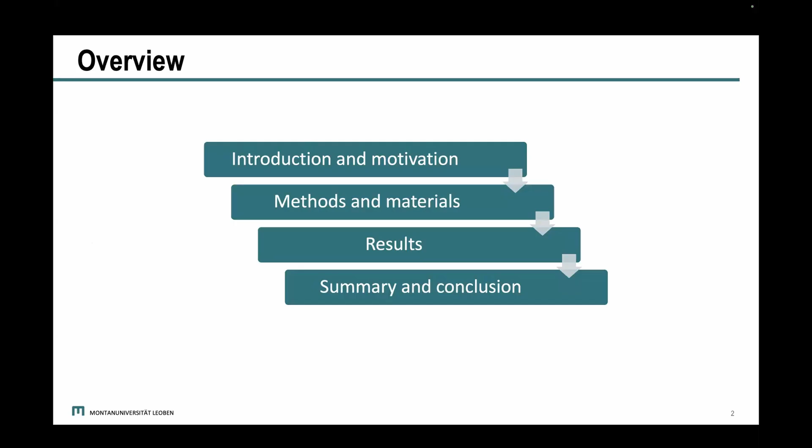At the beginning, we have a look at the content of the presentation. We're going to start with introduction and motivation, then we will go on with methods and materials, then have a look at results, and last but not least, summary and conclusion.

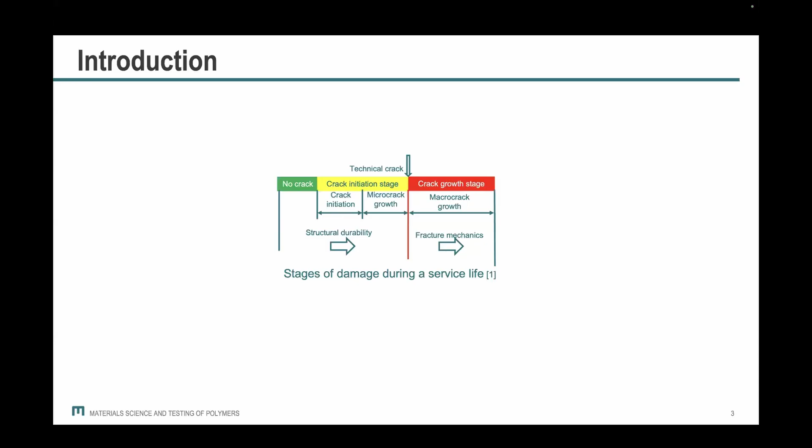Generally, the lifetime of each component could be divided into two different main parts. At the first part, we do not have any technical crack in the component. At the second part, we already have a technical crack in the component, and we have to deal with a growing crack in the component.

For the first part, we can use fatigue analysis. In fatigue analysis, generally, we deal with crack initiation and crack propagation. And the most powerful tool for lifetime estimation are the SN curves.

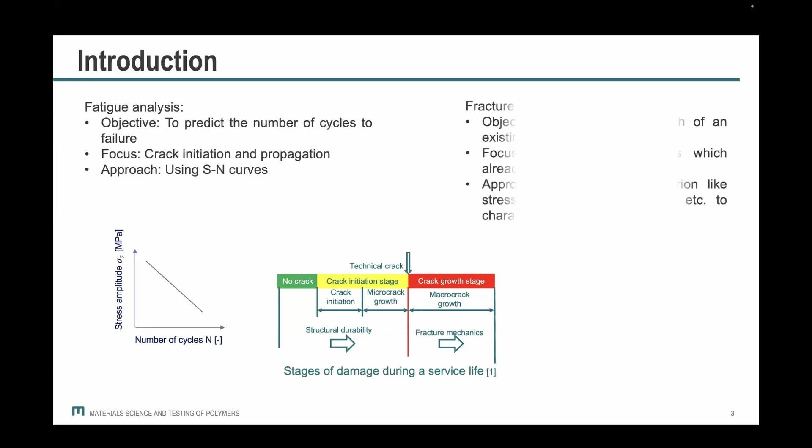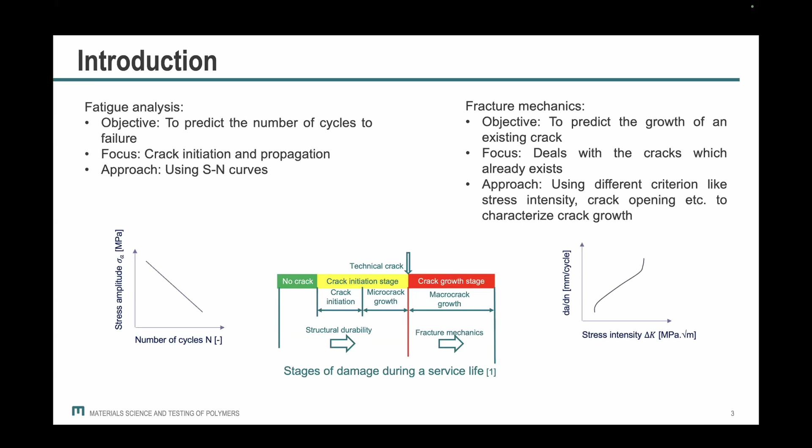We have also different tools for fracture mechanic analysis, but one of the most favored ones is the stress intensity against the crack growth rate, also called crack kinetic curves.

The main motivation or main idea of the presentation is to find any correlation between fractural behavior and fatigue behavior of the material of short fiber reinforced polymers.

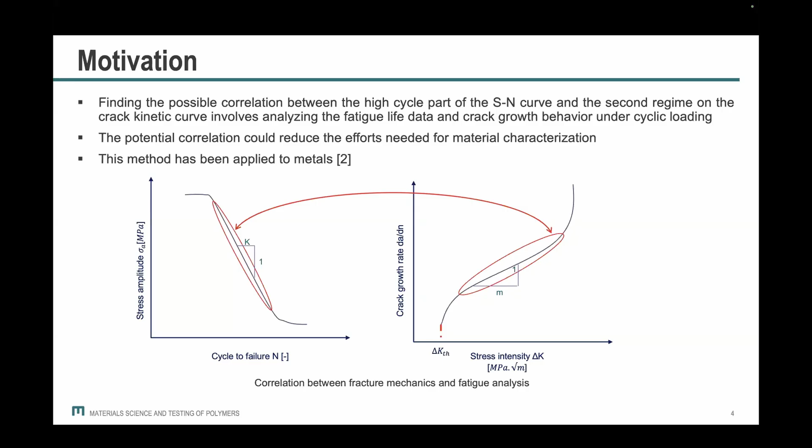This method has already been used for metals, and the main motivation for metals was that if a material has better fatigue behavior, it would also have better fractural mechanical behavior. And we know the fact that during production, we always have some defects in the material.

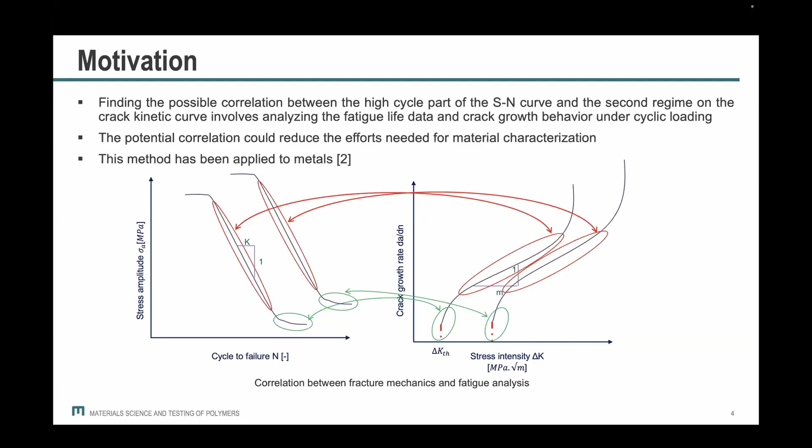In the literature, they use two different approaches to find the correlation: between the crack initiation part on the crack kinetic curve and the very high cycle fatigue regime on the SN curve, and also between the second regime on the crack kinetic curve, where we have stable crack growth in the component, and the high cycle fatigue regime on the SN curves.

For this study, we use just the first fracture mode, also called opening mode. Then here we have a deeper look at the methods which we used for deriving SN curves based on the fracture mechanic tests or fracture mechanic data.

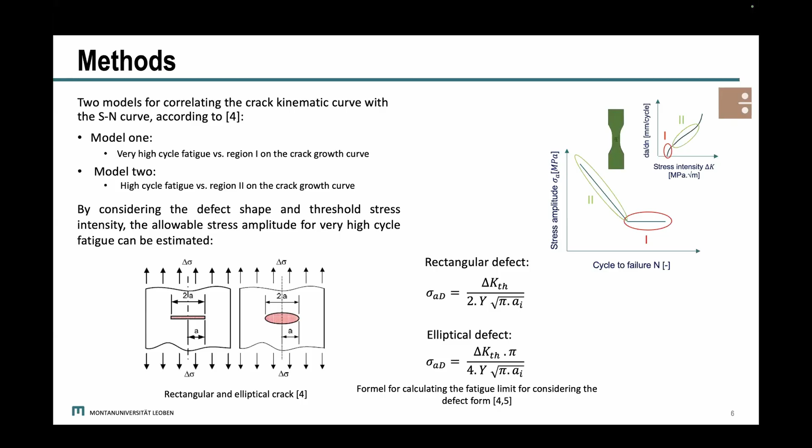In the second approach, they try to find the correlation between the second regime on the crack kinetic curve, and also the high cycle fatigue regime on the SN curves.

As I mentioned in the introduction, we can divide the lifetime of the component into two parts: crack initiation and crack propagation. But considering that from the beginning we have a defect in the component, we can neglect the crack initiation part and consider that in the whole lifetime of the component, we have crack propagation.

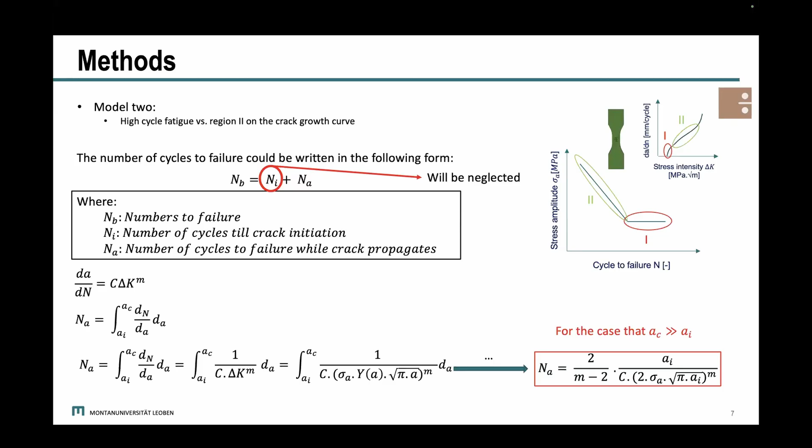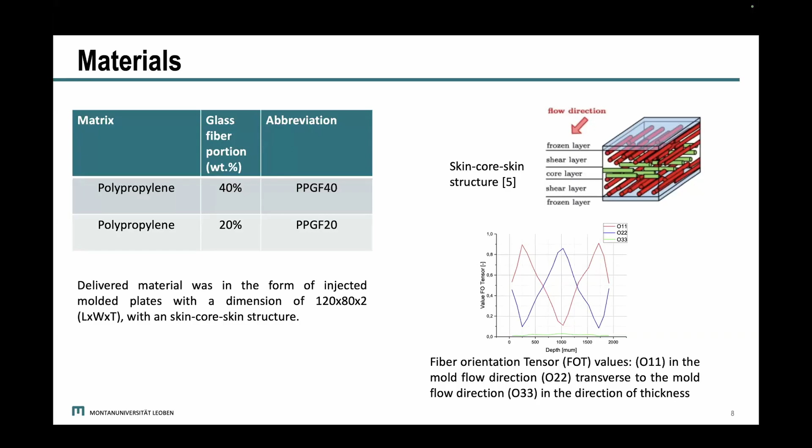As I mentioned, we have two skin layers on both sides of the plates, and in the middle we have a core layer. The red line shows the fibers which are oriented in the mold flow direction, and the blue curve shows the fibers which are perpendicular to the mold flow direction.

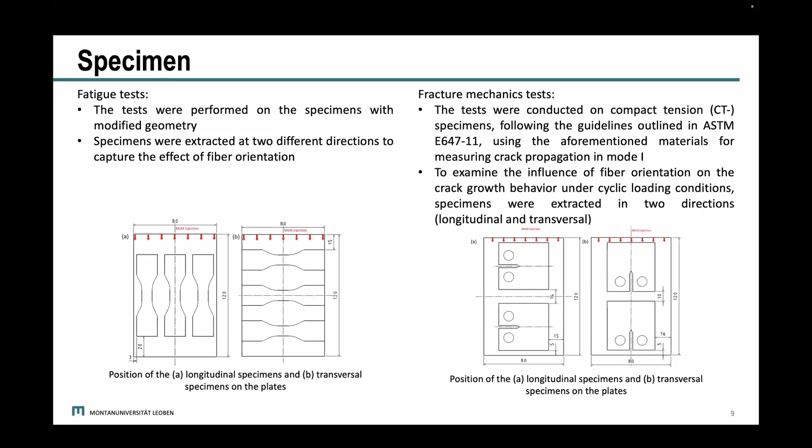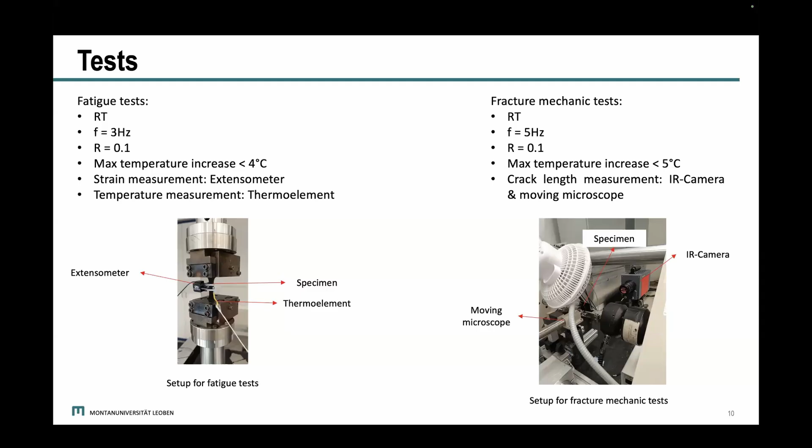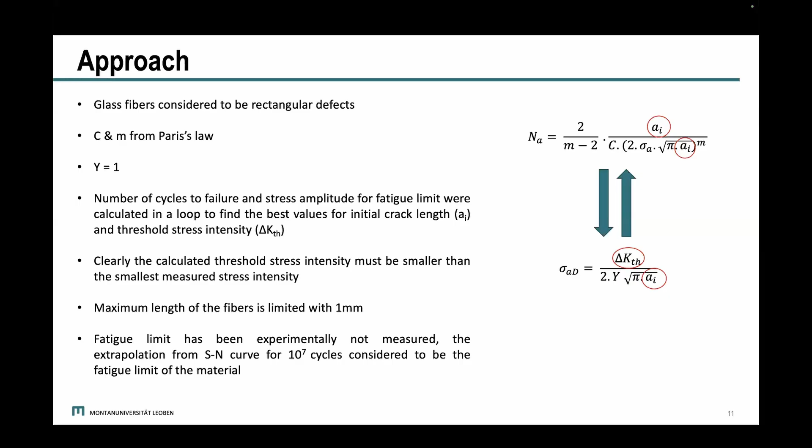Literally, the maximum length of the fibers is 1 millimeter, but we know that during the production process the fibers will break, so in most cases the final fiber length is smaller than 1 millimeter.

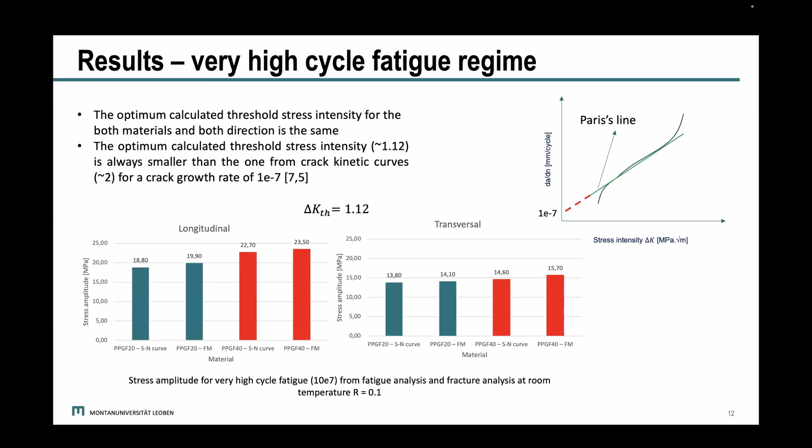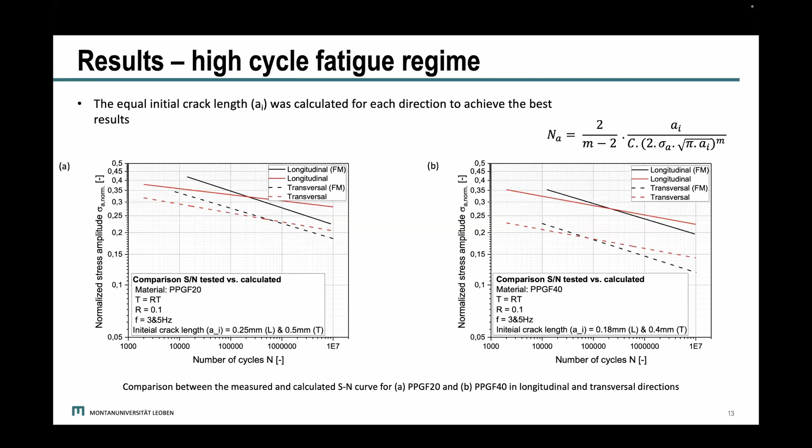Summary and conclusion: in this study, we used two different short fiber reinforced materials and tried to derive the SN curve based on fracture mechanic tests and crack kinetic data. For the very high cycle fatigue regime, the method worked better than for the high cycle fatigue regime.

It also seems that the threshold stress intensity depends only on the matrix, not on the fiber orientation or the fiber content.

In the next steps, we are going to measure the fiber length distribution for our material, and we will check whether the assumption is correct that the crack initiation part is negligible for the material, and also apply the method to other short fiber reinforced polymers.